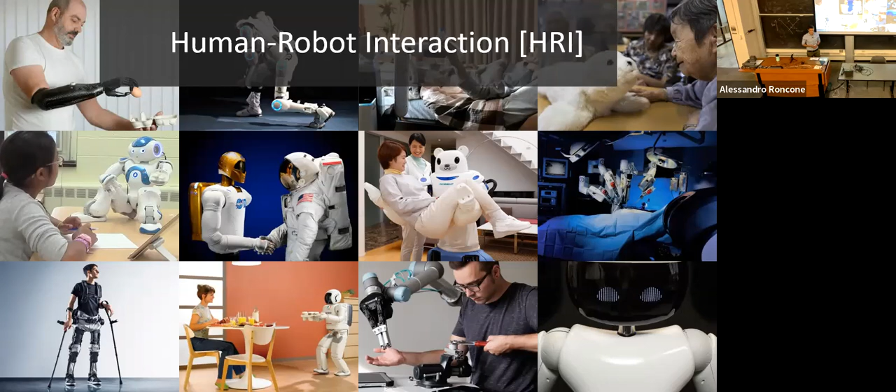So today I'm going to be giving you an overview of the research that my students and I have been doing in my research group, which is called the Human Interaction and Robotics Group. If you want to know more, please visit this link. For those of you who don't know me, my work is within the broader area of human-robot interaction, which, broadly speaking, deals with the problem of integrating robots in human-populated environments.

The reason for which one may want to do that is that robots can be very useful to people. They can provide assistance, support. They can replace humans in dangerous, tiresome tasks. They can augment humans, and this concerns both their physical capabilities and their cognitive capabilities. And all this is, in my opinion, extremely interesting.

But what is more interesting, in my opinion, is the fact that all of this development is happening in parallel with broader shifts in the field of robotics. Because I think it's important to remember that historically robots have been developed to replace people in a variety of different applications. This is the most successful application of robots to society, big industrial robots that are in factories that work 24/7, 365 days a year. They move very fast, they're very dangerous, and they never break.

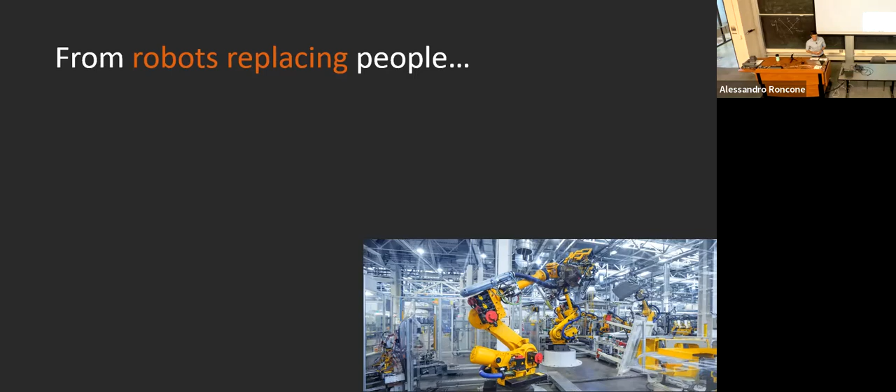But in the past 20 years or so, we started to hit a wall in terms of pursuing this paradigm of full automation. And there are plenty of examples of big forward-looking companies that are reintroducing humans back to the factory. I don't want to spend too much time talking about this specific problem, but I think this is a good example of the fact that autonomy and automation still have a long way to go to get to the level of human performance.

Humans are still much better than robots in a variety of different tasks. This includes tasks that involve fine manipulation, tasks that involve cognitive complexity, things like wiring things into a car, the stuff that is very hard for robots. Anything that involves precise perception is another thing that is very difficult to do with a robot.

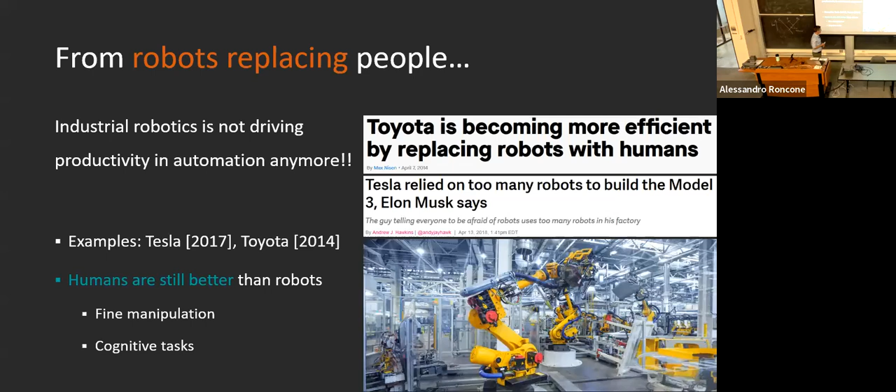So for this reason, we have more recently shifted toward the paradigm in which people are helping robots achieve tasks in a more complex environment. So robots are basically doing the same thing they were doing 20 years ago. But now we have humans with their superior perceptual, cognitive, motor capabilities that are augmenting robots in a variety of different applications. And this is better for humans, this is better for robots.

There's a lot of interesting research in this space. Robots need to still interact with people. But I think it's also interesting to see this as a transition. So we were operating in a paradigm of robots replacing people. Now we are operating in a paradigm of people helping robots. This is the present and the near future of robotics.

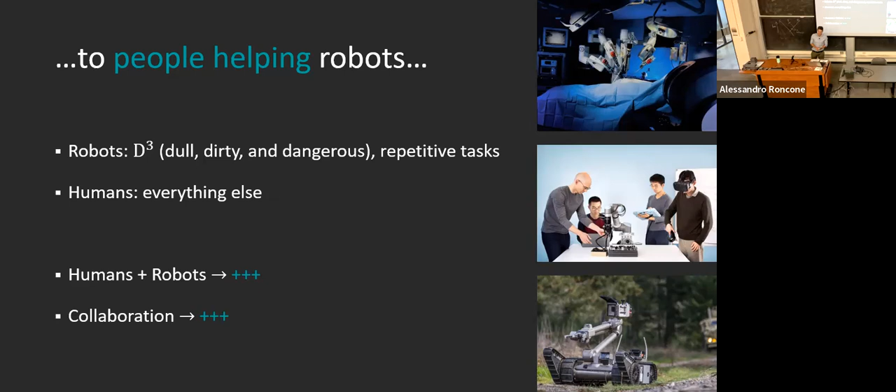What everybody is working towards is a far future in which robots are effectively augmenting and supporting humans in a variety of different applications. And this, again, is a very broad umbrella of applications in which robots can be useful, from logistics, manufacturing, construction, healthcare, and finally service and home robotics.

And they're going to be dealing with people in a variety of different domains, deal with untrained people, predict human behavior, and interact naturally with them.

I think that all of this is extremely exciting for us that work in human-robot interaction, but there are two sides of this. One side is that this, in my opinion, is a broader societal, economical, technological need that we see the field being pulled towards. But on the other hand, there's also an opportunity in terms of pushing the state of the art in the field to make this vision of robots helping people materialize.

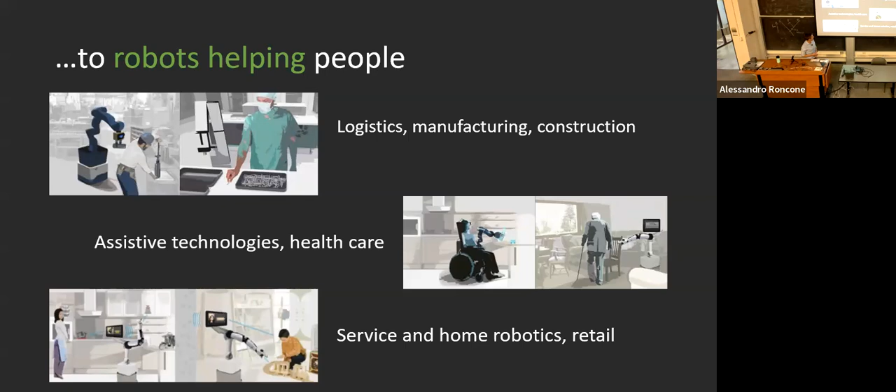This is a good summary of the research that we do in our lab. On one hand, we have this strong motivation, these interesting objectives to work toward. On the other hand, we sit on the state of the art of robotics at large, including neighboring fields like AI, machine learning, and so on, and on the state of the art of human-robot interaction, which deals with the problem of human-aware and human-in-the-loop systems. And we work to move the state of the art toward this broader vision.

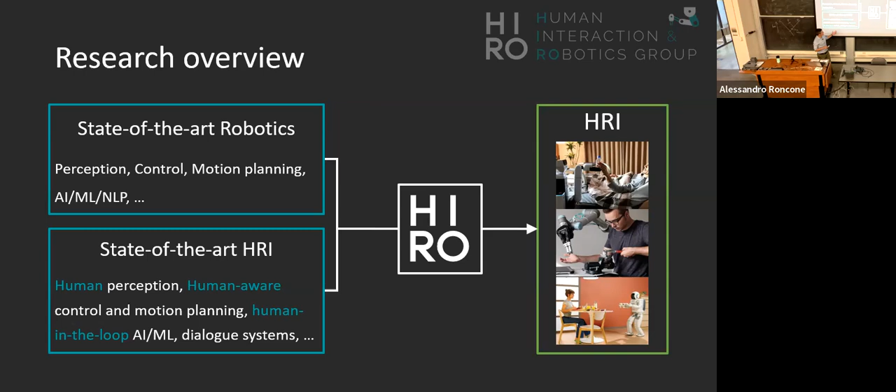I believe we are going to get there by looking at robotics as a system science, and in particular by investigating three core fundamental problems in this space. These three problems also constitute the three research strands in our group. I'm going to be talking about this for the duration of this presentation, so this is also serving as an outline of today's talk.

Briefly speaking, these three groups are: the group that works in physical HRI, so robots that are safe to people; the second strand working on robots that perform in complex environments; and lastly, robots that are better teammates.

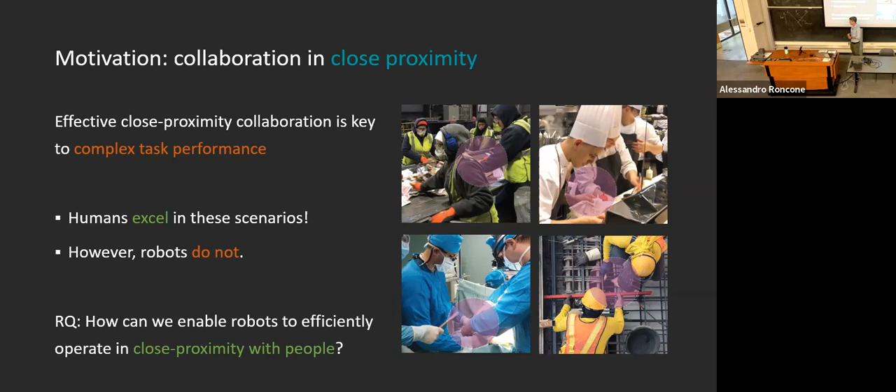So let's start with the first one, which is the strand that works in physical human-robot interaction. This is the problem of robots interacting physically with people, robots being safe around people, robots avoiding people, and so on and so forth.

This problem of collaborating in close proximity is challenging for the physical human-robot interaction group for a number of different reasons. If you look at my favorite example, the professional kitchen scenario - I worked in one, though I wasn't cooking, I was a waiter.

The first thing I remember is that it's a very high pressure environment with a lot of cognitive and physical load on the agents operating in it. There are significant safety concerns - burn hazards, sharp objects, other people. There are multiple agents with competing priorities and a lot of constraints: high clutter, mess, and most importantly, you are going to bump into each other.

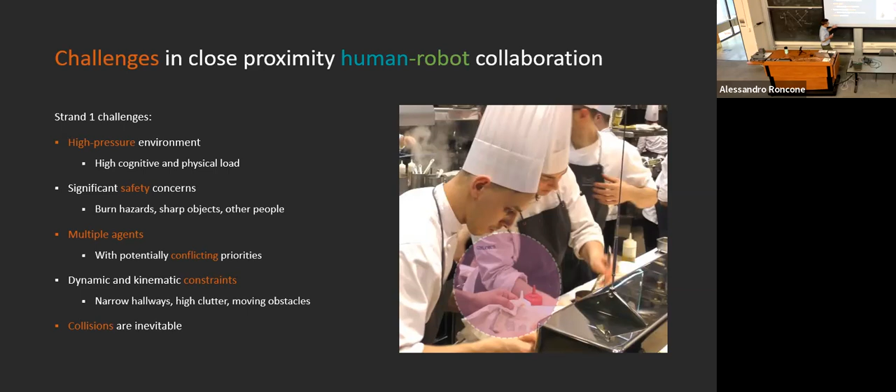So collisions are something you need to account for in control and motion planning. All of this is a problem for robotics, a subfield of research. But for the purposes of strand 1, we look at this as a perceptual problem first. State-of-the-art robotic systems cannot perceive obstacles and humans in this messy environment with the precision and speed needed to operate in these scenarios.

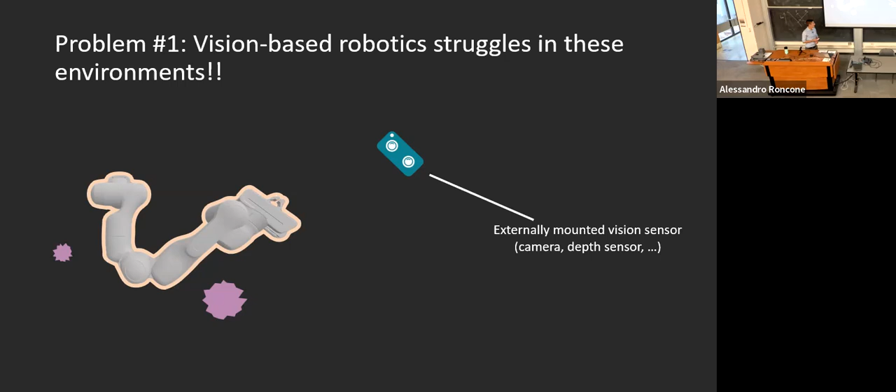If you take a simple example, you have a robot surrounded by obstacles and clutter, and traditional systems would place an externally mounted camera - a depth sensor or whatever you're using for vision-based perception of the robot and its environment. But because of these constraints, some objects might be detectable and some might not, and this already starts to be a problem.

You might add multiple cameras - one over here that perceives an object from this side. But the problem is that if you increase the complexity and clutter in the space, this doesn't scale up.

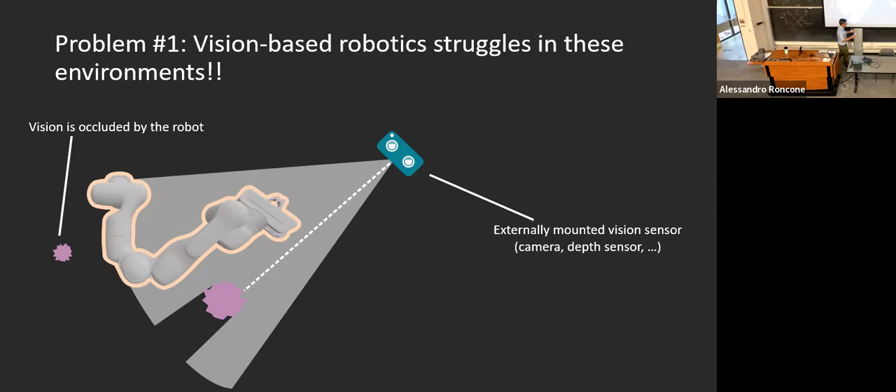To solve this, one may look at what humans do in these complex scenarios. One important difference is that they sense the environment from their own egocentric perspective - they look at the scene with vision from their own body, but also integrate this with the sense of touch, which is extremely important when operating close to each other.

This is a strong motivation for us to pursue research in developing artificial tactile sensing for robots - a big field of research. This has the advantage of not suffering from occlusions, and most importantly, of providing complementary information to vision. We can use this different type of information to enrich the data we get from the environment and better behave in this space.

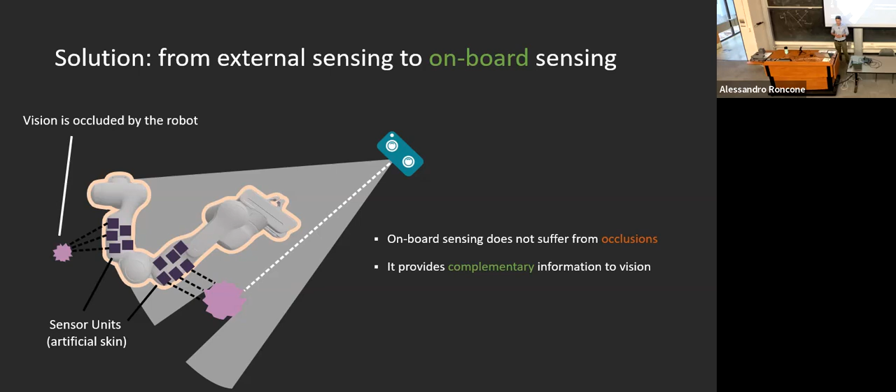Another thing humans do very well is not only perceive from their own perspective, onboard sensing, but also perceive particularly well in an area immediately surrounding their bodies - the concept of peripersonal space. There's a lot of interest in neuroscience around this, something I looked at during my PhD. This concept says that in a region of 20 to 40 centimeters around the body, humans integrate information from vision, touch, and auditory signals.

We do that because this area is particularly important for our safety. We can extrapolate this principle to robotics, but also look at superhuman capabilities - rather than just detecting contact, what about perceiving objects through proximity sensors distributed along the robot body? This information doesn't come easy to humans.

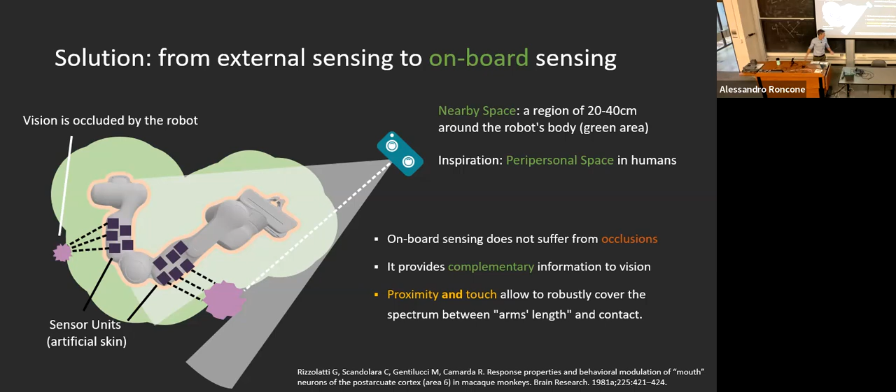We do some sensing at a distance through our body hair, but not too much. This capability allows us to cover the spectrum between perception at arm's length and perception on the robot's body - bridging the perceptual gap between vision and touch. On one end you have a well-explored area, distal sensing through vision, which gives a lot of useful, information-rich data, but suffers from occlusions and low bandwidth.

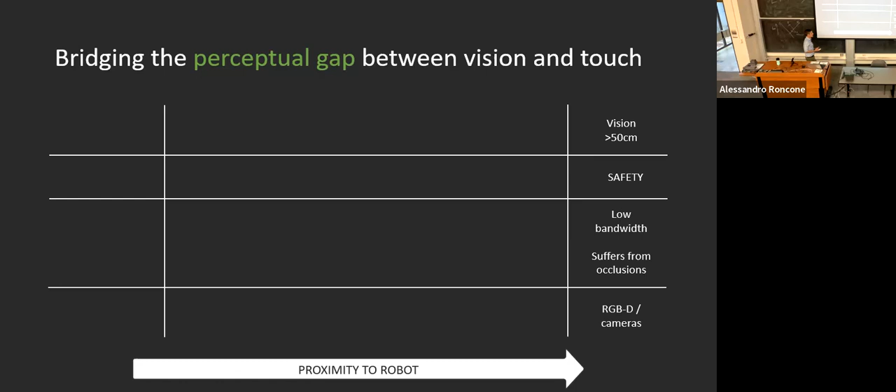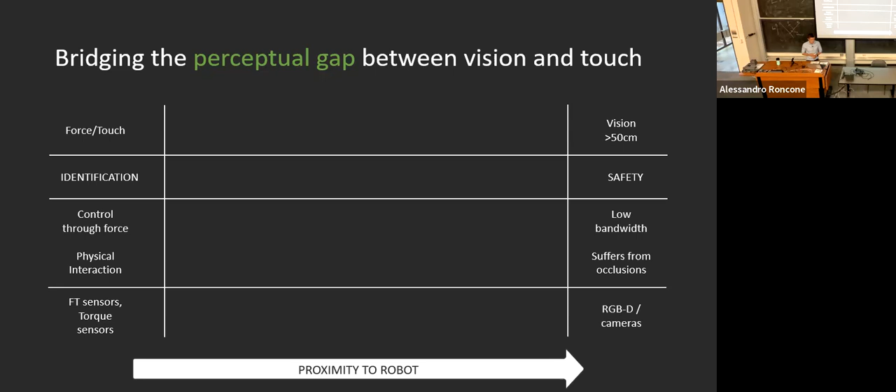On the other hand, touch is great because it gives information about collisions that is relevant at all times. However, at times you don't want to wait for a collision to happen before reacting - you want to predict what happens in this liminal space between far sensing and on-body sensing, and this is where proximity sensing can be useful.

One hypothesis we're investigating in our strand is that by achieving dense and rich perception in this space, we are going to unlock new capabilities.

So to investigate this hypothesis, Mary set forth to develop a set of hardware designs. There are multiple designs, but they all have one thing in common: they can sense proximity, sense objects near the sensor by means of a time-of-flight sensor, using infrared. You send an infrared signal out and wait for it to come back, and you can use that to retrieve the distance of objects from the sensor.

These boards are self-powered and self-contained, with a Wi-Fi chip, so you can take them, power them with a phone battery, stick them onto the robot, and perceive objects in the proximity of the robot. Together with a kinematic calibration system that allows us to locate these boards on the robot's body, we can retrieve the 3D pose of objects in the environment.

And thanks to these boards, we can also approach another problem I mentioned earlier, which is the fact that collisions are inevitable. The environment is too constrained, humans are faster. Traditional controllers in these spaces would just catastrophically fail. If there are too many constraints, the robot stops operating, and that's not acceptable in realistic scenarios.

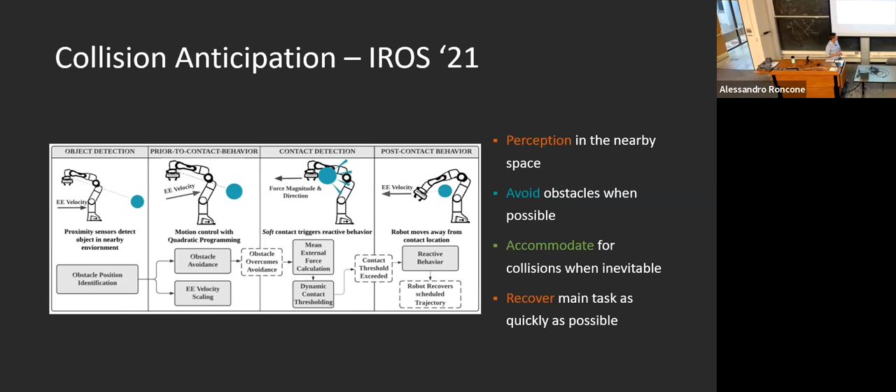So again, the first step is our perception. We are perceiving only through proximity sensors. Obviously in the ideal case, our hypothesis is that we start with this very low-level data. And importantly, proximity sensing is much faster than vision—three times faster than a traditional camera sensor. This is what we argue is enough for this safety focus.

Looking more—if you click on the chat and just look at it, then afterwards it'll hide the whole bar. Ah, really? Okay, nice chat. Glad, okay, yeah, you know, after two years of this—maybe three years, I don't know anymore. Okay cool, but now it's spinning, sorry, now it's spinning. You can't have everything, you know. Let me find my mouse in this other screen. Okay, let's try again.

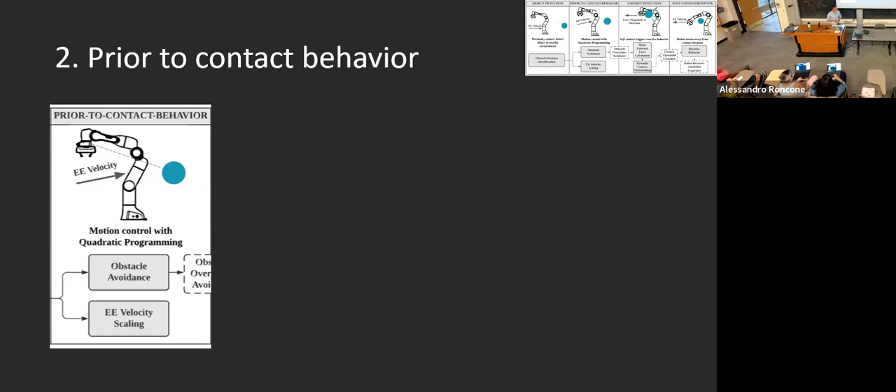Okay, so we were here, and I was going to transition to step two, which is obstacle avoidance control. When an object enters this region of interest around the robot's body, I can create a robot controller that uses this information to stay as far away as possible from the obstacle, while satisfying the main task trajectory. This is done in a velocity control mode, meaning every 10 milliseconds we send a velocity to each of the 7 motors of the robot.

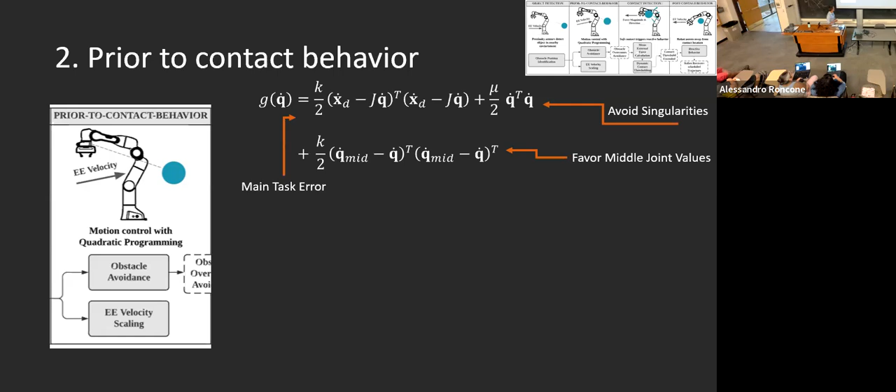This is done by exploiting the redundancies intrinsic to the kinematics and mechanics of the robot. This means we are not only able to avoid obstacles, but also able to stay as close as possible to the main task trajectory. This is done in a quadratic programming formulation—there are a lot of equations in between that I'm not going to cover.

But another capability that perception in this space allows is that when an object comes in, I can slow down my end effector. I can still perform my task, just slowing down the end effector to be a little safer and better at accommodating for contact.

The other element of this is restricting movement on parts of the robot's body closest to the obstacle. So I can tell this motor to not move in the direction of the obstacle, to only move in this direction, and tell all the other motors to accommodate for this change in the task while we're controlling the robot.

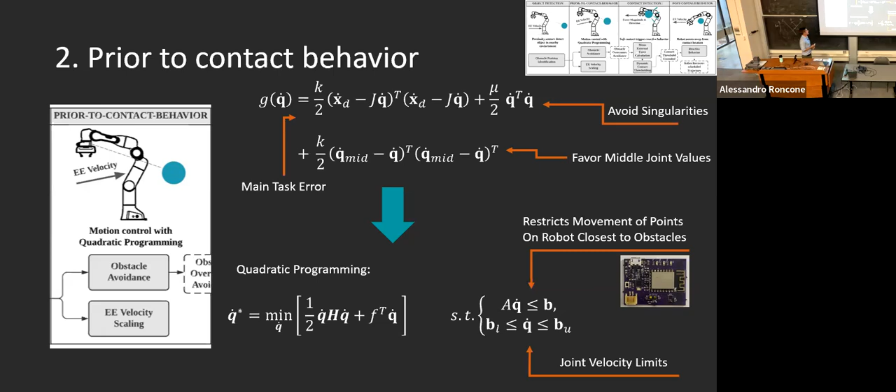Again, there are tons of equations here that I'm going to be glossing over, but videos are better than equations. This is just a quick demonstration of the integration of proximity readings with this controller.

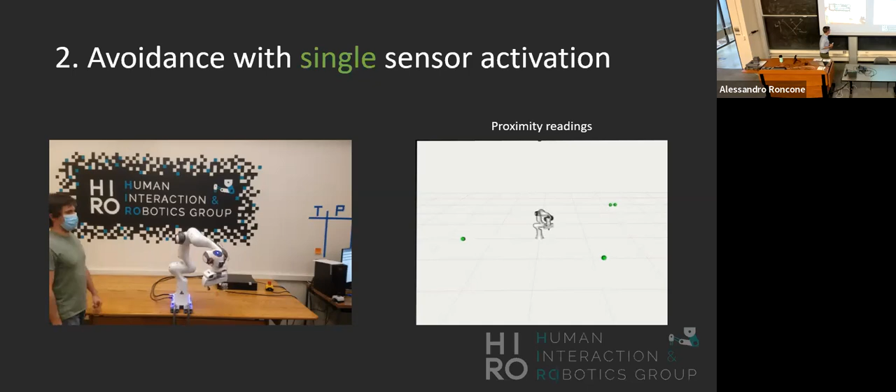These are just 5 skin patches that are detecting proximity data in real time. Right now, they're very far from the robot because it's like the ceiling, the floor, the walls. When the cable comes in, you're going to see this one getting closer to the robot. And when it overcomes a specific threshold, the robot is going to start to avoid. And this is what happens over here.

Obviously, Kane here being particularly annoying, just to demonstrate this capability, but also with multiple sensor activations. In this case, you just take the average reading from all these multiple sensors. But this is already a good step toward achieving better behaviors when working closely with people.

But as I mentioned, the interesting thing happens afterwards. If I have an object that moves so fast, so much faster than me, and I cannot avoid it, I want to gently accommodate for contact.

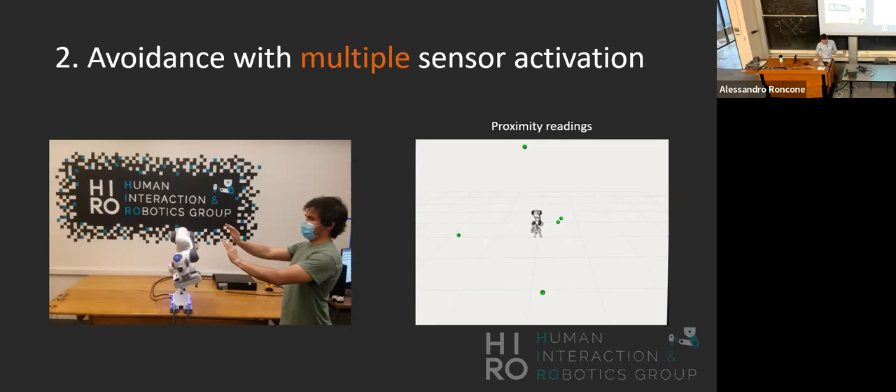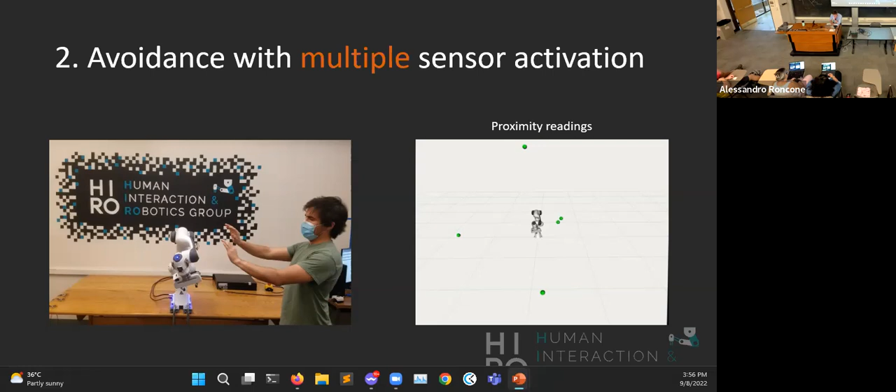And I do that by, oh, there's no way. This thing, no. I'm gonna be talking about it because otherwise we're never gonna end. I do that by computing, okay. Let's start the program. Number 2, sorry for that. Obviously, I prepared this and it didn't work, it didn't happen. Okay. Okay, almost there. Okay.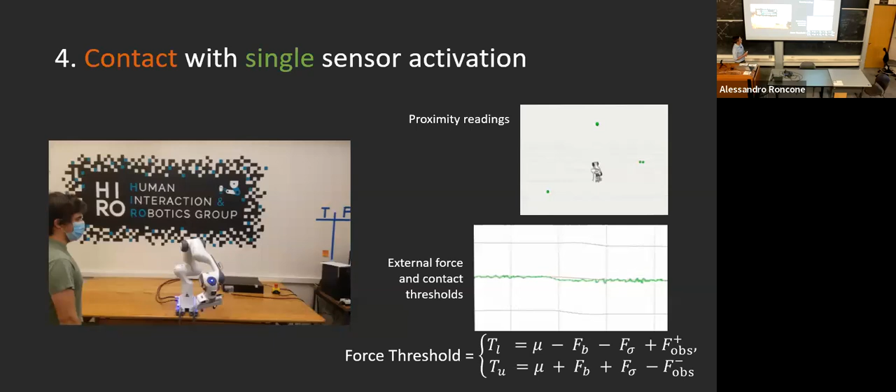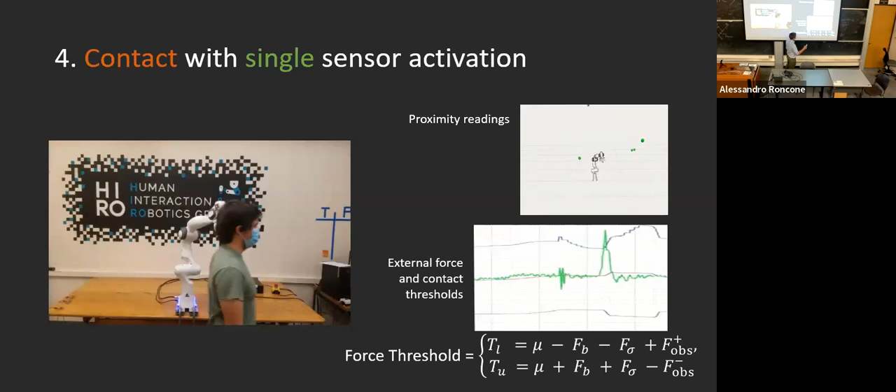Okay, video is nice, I hope it's not going to freeze my computer. But what you can see here is the same behavior as before, but this blue line is showing the force threshold we're talking about. When Caleb comes into the proximity space of the robot, these forces become lower, so that the robot is more receptive, and the collision is detected before you would otherwise be able to detect it without such a system.

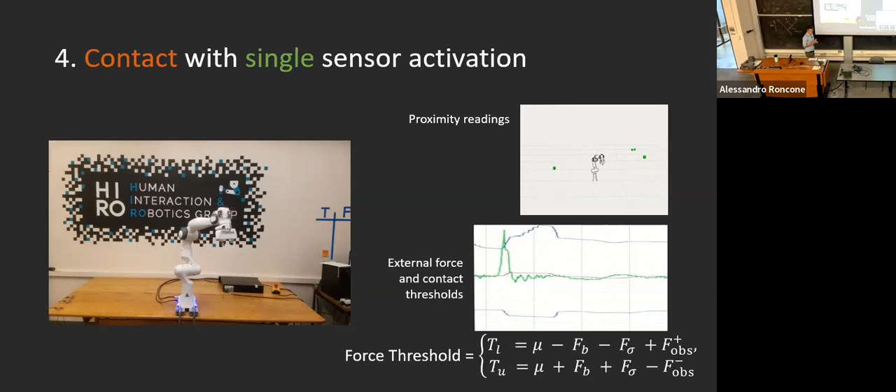In conclusion, this is a good example of what I mean by having a systems approach to robotics, because we looked at how a new perceptual capability unlocks robotics capabilities downstream. Again, this is something people have been investigating, but they've usually stopped here: avoiding contact when you can, and then stopping the controller when you can't.

But what you can do with this new perceptual capability is also accommodate for contact, reducing the contact force when it's inevitable, and being able to resume your trajectory faster than the state of the art. Obviously this is a very first step, but I think it's also a very important step that allows us as a community to shift from avoidance at all costs to prior-to-contact behavior.

Caleb and Natalia are also working on a number of follow-up works. This is an IROS 22 paper that is basically a benchmark to validate multiple controllers in physical human interaction. There are a lot of other little things I'm going to be showing you later. But this is just a good summary of the type of research we do in strand 1.

Let's move on to strand 2, which is focused on robotics proper. And it looks at improving the state of the art for robots to operate in these complex environments.

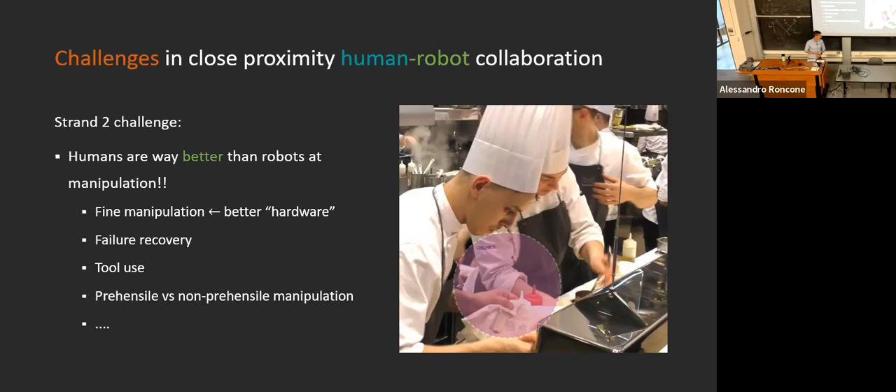And this is in stark contrast with the state of the art of robotics, which typically focuses on research that advances grasping and manipulation — pick and place, moving objects from point A to point B, and so on and so forth.

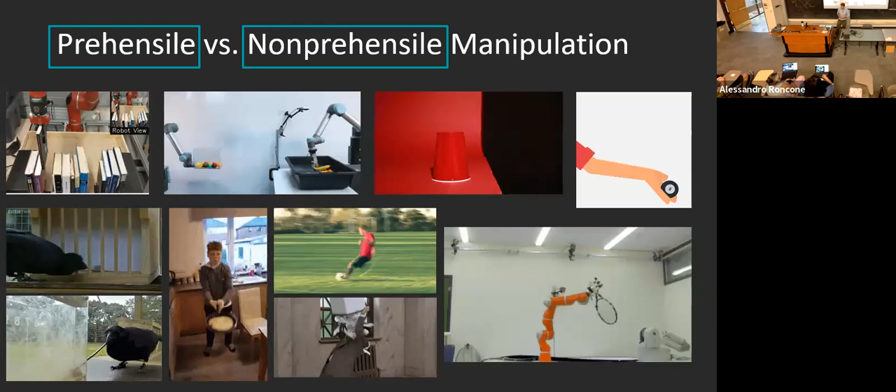However, both humans and animals—there's a lot of interesting stuff on crows—are able to interact with the environment in a lot of other ways. You can throw, kick, toss, flip, pull, push objects, and this comes at an evolutionary advantage when you are operating in these complex scenarios.

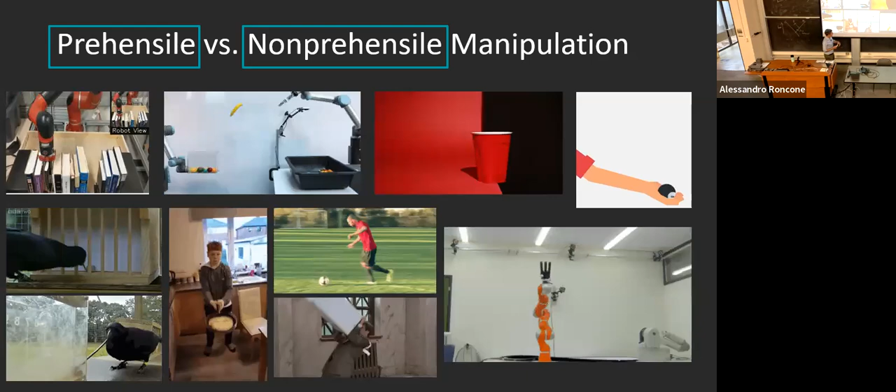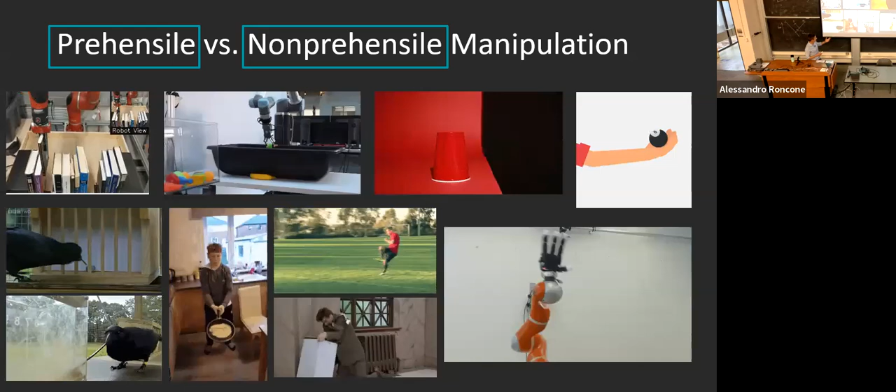So Anuj, together with Ishan, set forth to investigate the hypothesis that non-prehensile manipulation, which is anything but grasping, is important and useful for robotics, and among all these possible non-prehensile manipulation primitives, that poking is the most fundamental on one side, and also the most complementary to grasping.

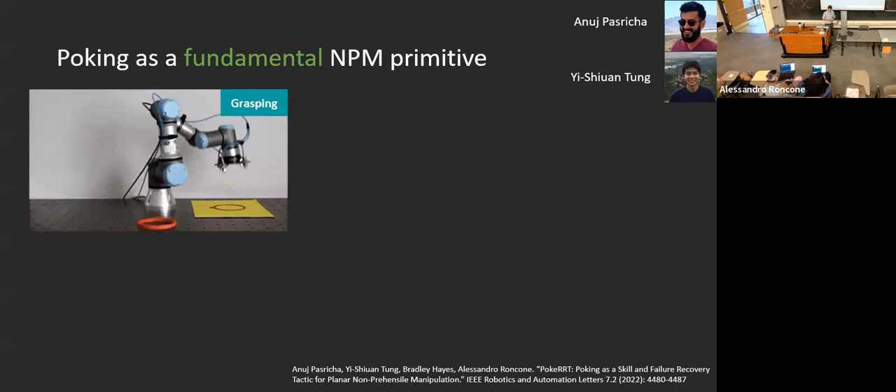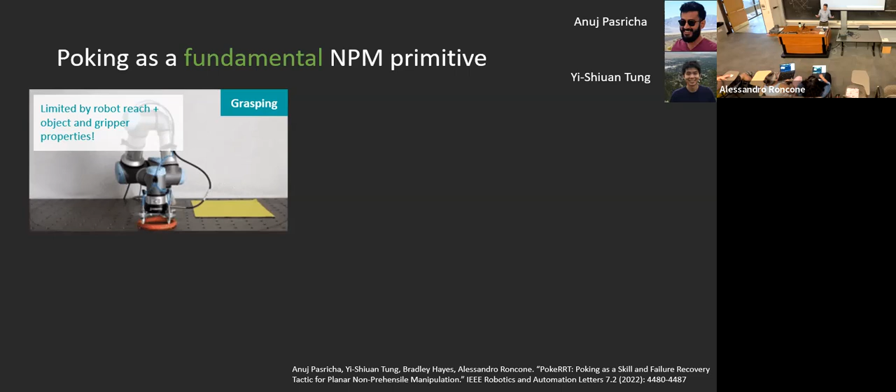Because if you look at grasping—again, we have a lot of research in prehensile manipulation—grasping is limited by the physical capabilities of the robot. Each task is limited by the gripper. If you have too small of a gripper, you cannot grasp, right? So you have to design your environment around the limitations of the robot.

The most explored non-prehensile manipulation primitive is typically pushing, but pushing is also limited by things like manipulation speed—you have to slowly push objects around in order to succeed in your task. On the other hand, poking involves impulsive manipulation, and it doesn't have these limitations.

It can operate outside of the boundaries and outside of the reach of the robot. It can allow for faster manipulation than pushing, and it doesn't impose strong restrictions on the properties of the object. So all of this makes poking very interesting for robotics.

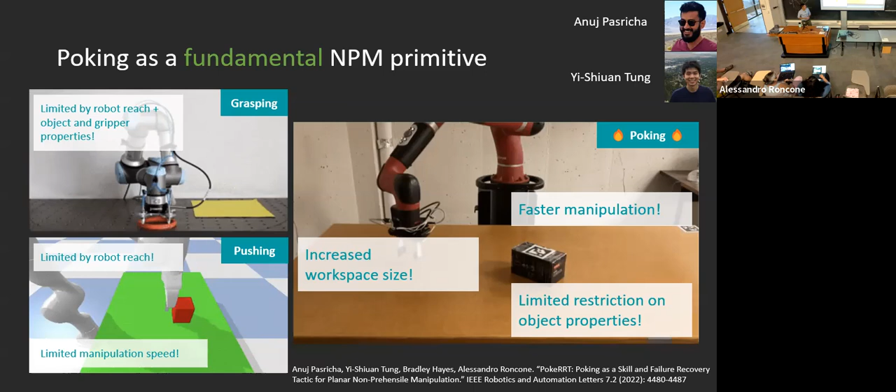To investigate this hypothesis, we started by formalizing a control primitive for poking. This is pretty straightforward: you have an object on a planar surface, you identify a target control point, and then you send a control command to your end effector to push this object with a specific velocity, which basically sets the object in free sliding motion until it stops due to friction.

We base ourselves on this formalization of the poking primitive, and then we created an RRT-based algorithm that combines this control method with traditional sampling-based motion planning. I won't go through the details of this, but the most important component of this approach is that it's action-oriented.

All the nodes in our graph are valid configurations, and they are valid because we are integrating this approach together with simulation in the loop. Modeling the mechanics of friction is still very hard to do, even state-of-the-art in mechanics. By using a simulator, we can basically short-circuit this need, because the robot can simulate a lot of different pokes in simulation, and we can use that as information for our motion planning.

We evaluated poking against two other primitives, pushing and grasping. Again, here we are not looking at poking as the solution to our problems—it's more about poking as a good complementary capability to grasping. We have a variety of different scenarios, motivated by a true robot collaborative setting in which a robot needs to pass an object to another robot.

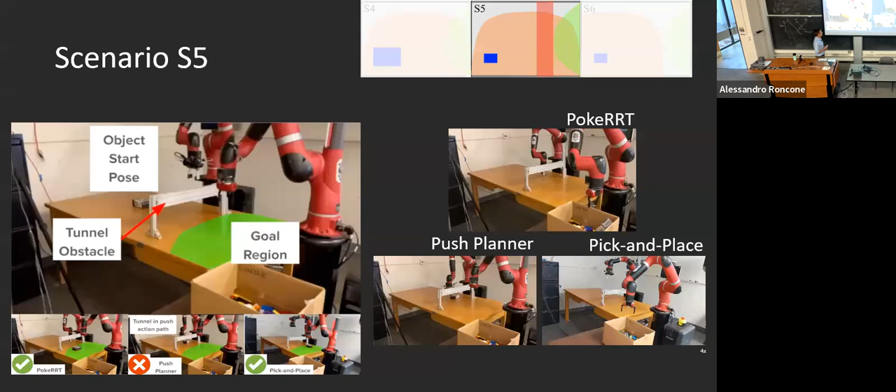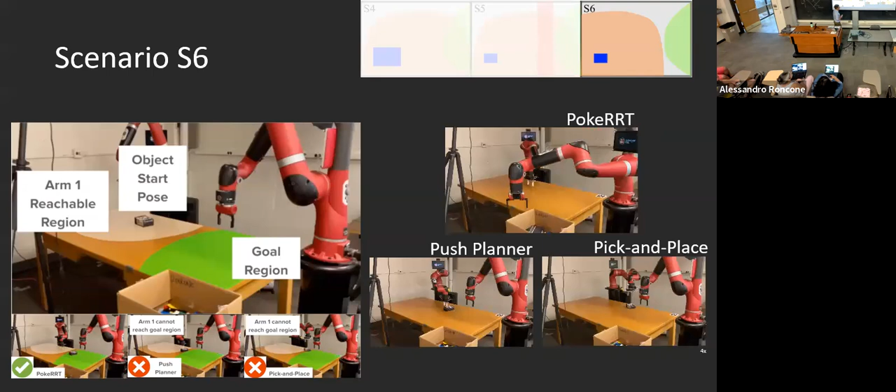You can still poke it across various boundaries. All of this is very qualitative, but it's supported by simulation and a lot of numbers and tables—that's what we do in motion planning. These results reflect the qualitative observations: poking is faster than pushing, which makes it better than pushing, and poking is also more generally applicable to all these corner cases that I just showed here.

In the real world, similar things happen, with the caveat that simulating friction, as I mentioned, is very hard, which means you're going to have higher task times when performing these actions. Poking allows for planning on the fly, which is also very important. If you fail at grasping, you have to start over. If you have a poke that doesn't push the object exactly where you'd like it to be pushed, you can replan on the fly and take that into account.

What I think is particularly interesting, beyond demonstrating that poking is useful for robotics, is the fact that, as humans do, we interact with the environment in a variety of different ways. So one of the things Anuj is working on as future work is creating a planner that can plan across these different capabilities. Grasping is great and it works 80% of the time, but what if we give it a plus 20%, plus 15%, when we add poking and effectively plan across these complex manifolds that the robot can take advantage of?

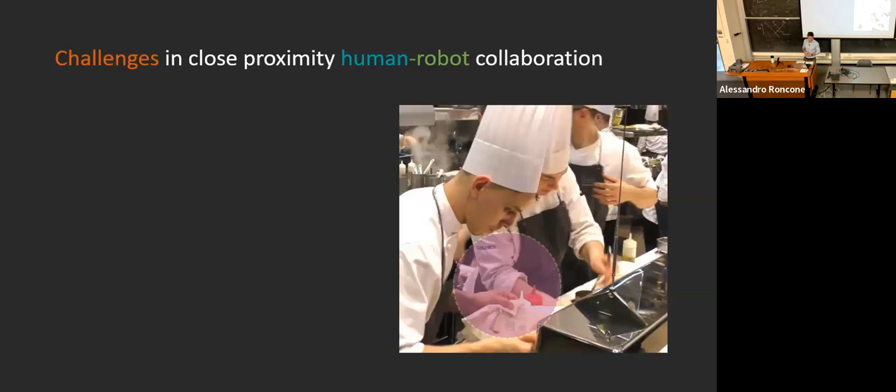This strand focuses on robots being better teammates. After robots that are safe, robots that are better, then I can start thinking about maybe deploying these robots in my application. But there's another final element to this equation: humans are great in these scenarios also because they are great at working together. Robots are pretty bad at that—it's hard to perceive humans, hard to understand what they're doing, hard to negotiate and synchronize between the human and the robot, and it's also hard for humans to understand and predict what the robots are doing.

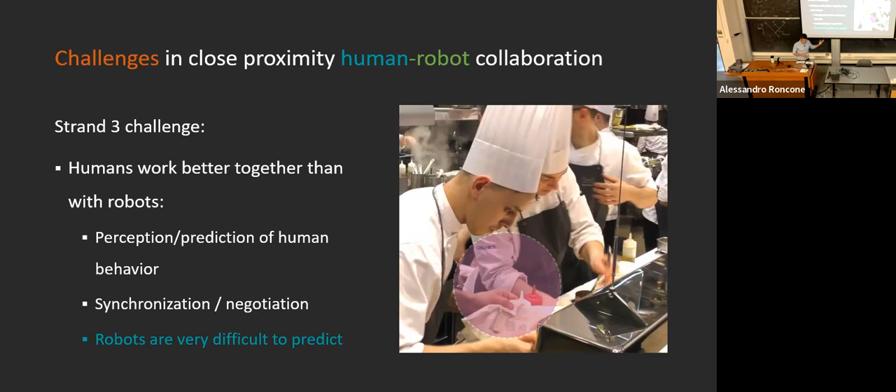So the research question that Claire and Maria are asking is: can a robot that expresses pattern-like behaviors make for better robot teammates? We explore this by playing a game with the robot. In this case, games are great.

In this game, you have a board with a number of objects of different shapes, colors, and positions. The human and the robot each need to pick an object from the board. They don't know what the other agent is doing. If they select the same object by color and shape, they get a reward, remove the object from the board, and continue. If not, they fail to coordinate, get a penalty, and have to try again.

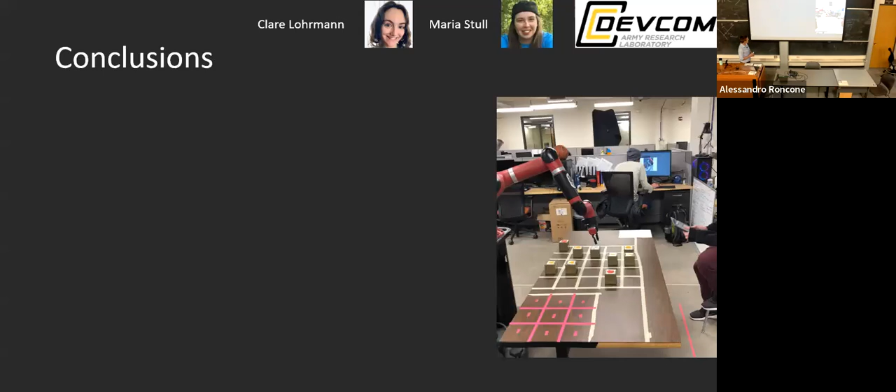So to conclude, yes, this suggests that behavioral patterns are useful and important in improving coordination between human-robot teams. But what I think is more interesting is that this is just an observational study. We can observe this behavior, and it's interesting behavior.

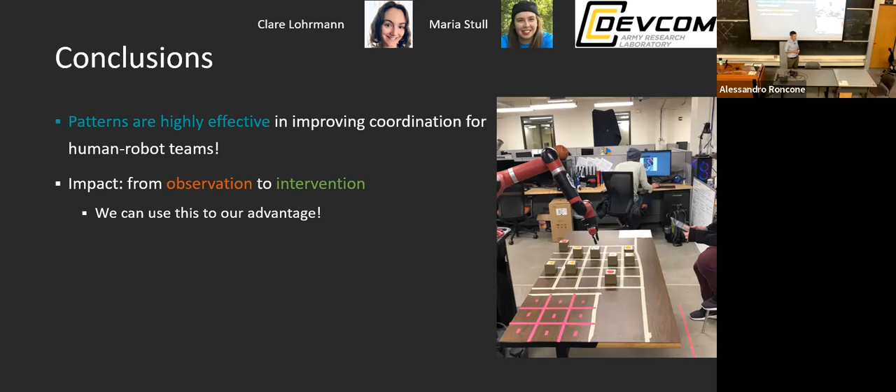What I think is very interesting is how to use this little trick to our advantage in future work, and there are plenty of examples. Together with Brad, we have a project from the Army Research Laboratory exploring the consequences of this finding, particularly the fact that you can use this for aligning behavior when you have changes in the face of uncertainty. So you have a perfect team that works together, something happens in the environment, how can we synchronize again to operate in this new environment? We can use these little tricks to make the team work better and faster.

But we can also use this for human-in-the-loop decision making, for policy learning. If you have environments that are suboptimal by design, with no notion of optimality, but maybe thousands of possible suboptimal policies, you can use this information to discern which behavior would be better in the context of teamwork. There are a lot of other interesting directions that I think this work can lead towards.

Okay, so this ends. I have no idea what time it is. It's a little bit late. But this ends the third part of this presentation.

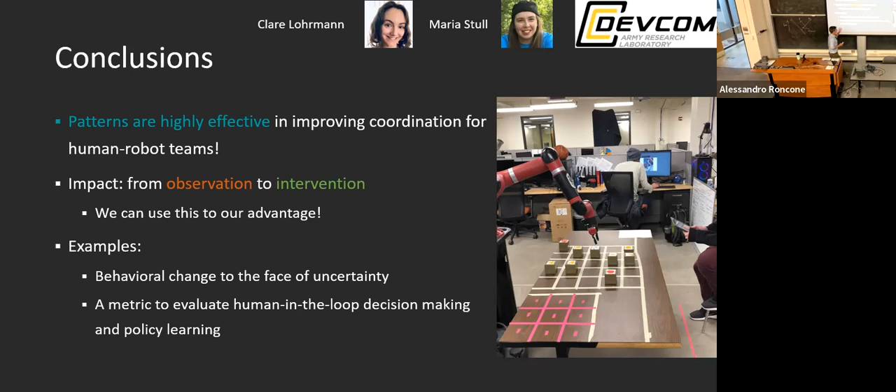Let me move to summary and future work really quick. As I mentioned, this is what we do. We want to work towards these objectives, and we want to do that by looking at what the systems are and by contributing back to the state of the art.

I think it's important to focus on these three domains individually, but also to look at the intersection of these fields. In terms of future work, I hope our research will go in two directions: expansion, which means expanding research in these areas, and on the other hand, consolidating research across these areas.

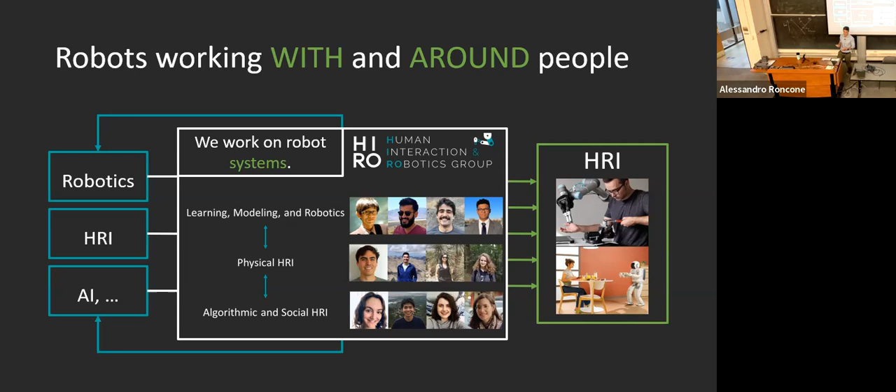I don't want to spend too much time on this. We have a lot of interesting things happening for each of these strands. Natalia's GRFP is on motion planning for in-touch. We have a lot of other papers, and we are working on new hardware.

We are starting a project together with Carson Bruns from ATLAS and Dan Safier on deploying these robots in organic chemistry laboratories. These are as dangerous as a professional kitchen—a lot of people die in these scenarios. So this is a great validation of all the things I was talking about, and I'm very excited about this.

This just started last week, so we don't have any results yet. For what concerns Strand 2, as I mentioned, we are looking at multimodal planning across skills.

Gilberto, in his fellowship, is translating this idea to the problem of failure recovery for space exploration. If you have a robot in space that is manipulating the environment and you have a failure you didn't plan for or expect, you can use these multiple skills to still perform the task, at least part of it, with the rest of your body. In my opinion, this is a very interesting direction.

Joey, together with Rohui, who was a PhD student of Dijon, worked on multi-agent reinforcement learning and multi-objective reinforcement learning. And finally, Stefan worked on intersecting robotics with natural language—models that can reason about physical events and use this information to improve our understanding of language.

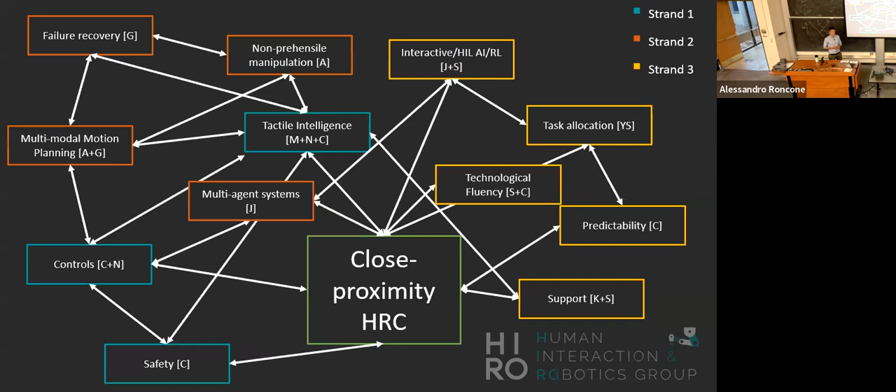This is just a little game we did over the summer with my students, where we looked at who we might collaborate with and why they should do that. We're not going to cover all of these collaborations in the future, but I hope we'll see more of these things happening in the next few years. Don't hold me accountable, because this doesn't depend on me—I'm just trying to convince my students about this.

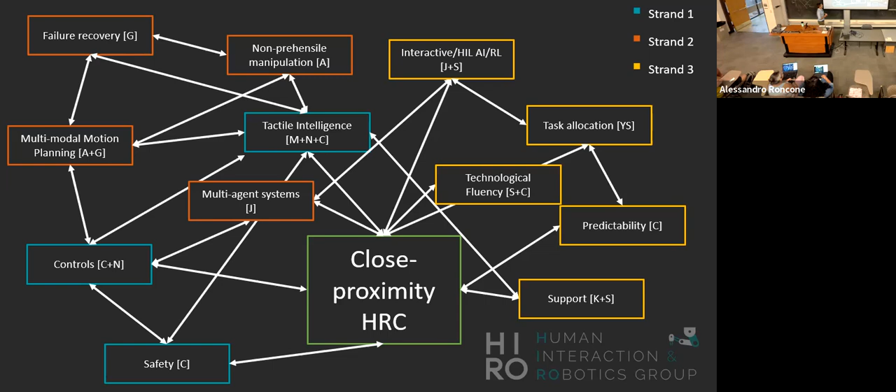But with that said, I'm going to end here. Thank you again—thanks to my students first of all, thanks to my gracious funders that made this happen, and lastly thanks to all the collaborators and students that passed through my lab. I couldn't include all the pictures, and I probably forgot somebody. In particular, thanks to these three guys right here, with whom I shared countless discussions, papers, projects, proposals, peers, and also a book we're publishing with MIT Press—an introductory robotics book, by the end of the year I think. So thank you all, and I'll be happy to take any questions.

Questions? Be shy. Nice picture, right?

Yeah, very nice. So you mentioned, I believe in the RRT discussion, that you're using a simulator, physical—like contact models are included into the simulator and are not great, then very bad. So I'm curious, is it the amount of sampling that you do that helps overcome the limitations of the simulator? You sort of get an aggregate of what the likely outcome would be, and maybe you put a finer point on it.

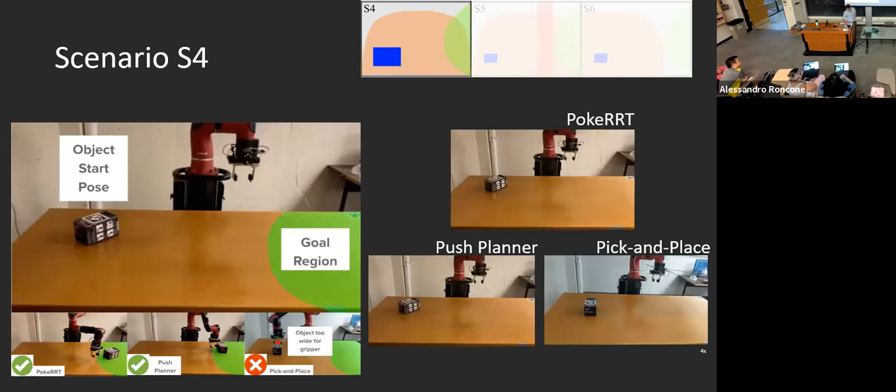Basically, the way it works is that we buy off-the-shelf sensors from electronics places for about $1 each, and then you can fabricate it yourself or send it to companies that do that for you. Just the parts are around $25 for this type of thing if you do it yourself, and if you go to a company it gets to something like $40-ish. So still low cost, but again, these are just a lot of prototypes.

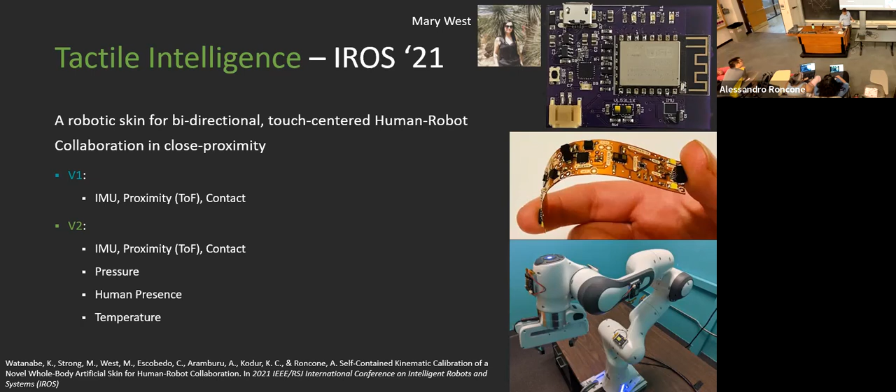We are working also on another set of prototypes, soft hardware with color changing schemes. All these are interesting things. I would really like to have hundreds of these sensors at some point when we finalize a design we decide on. Rather than trying with 10, we're gonna try with 1,000, but we are not there yet.

Alessandro, we have a question. Danny, do you want to unmute or ask your question? I can unmute, let's see if you can hear me okay. Yeah, okay Alessandro, thanks so much, it was a very nice presentation.

So I think in one of your slides, maybe even the one you're showing right now, you were talking about an upcoming deployment in some chemical engineering space. Can you tell us a little bit more about what excites you, who's the partner, and what excites you about some real world deployments of this cool research you're doing?

Yeah, so this is a collaboration with Carson, who is in Atlas, and he's a mechanical engineer. Atlas is mechanical engineering. He's an organic chemist, and he does a lot of cool stuff like programmable tattoos and stuff like that.

We basically sit together and started to think about the fact that it would be really nice to have robots in these spaces because they are very dangerous and super stressful. There are significant safety hazards that result, literally, in people dying every year in these spaces. So we found that this is a very strong justification for exploring this space with robotics.